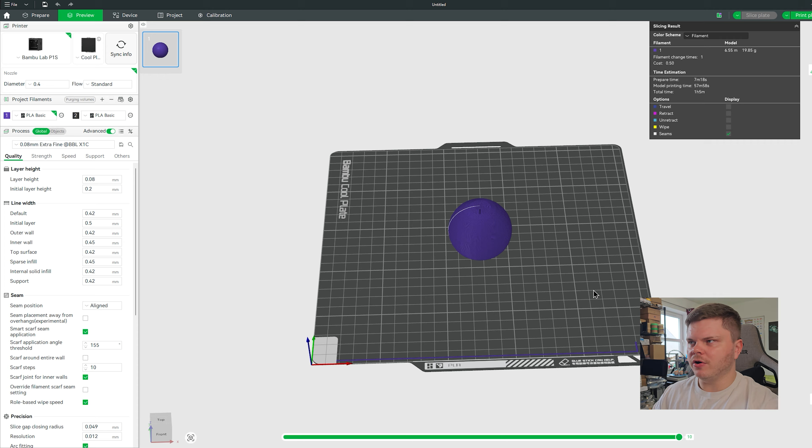Just a side point, you don't have to change the whole print profile to decrease the layer height. You can do it here in the quality tab. Under layer height, you can set this to whatever you want. So if you wanted 0.08, you can write it there instead of changing the whole print profile.

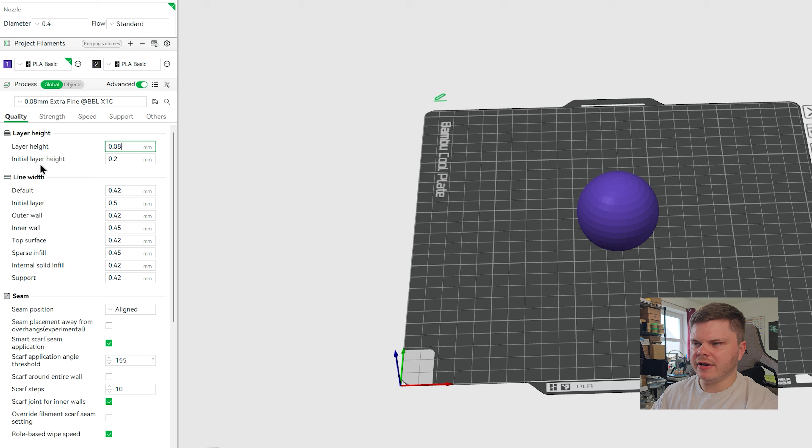And as you can see, you can also change the initial layer height, so the layer height of the first layer. Even with the 0.08 millimeter layer height, this is still set to 0.2. Basically, if the layer height of your first layer is too small, this can lead to bad print bed adhesion. That's why the first layer is usually still kept as 0.2 or higher.

So if I change the layer height back to the standard 0.2 millimeters and then slice and zoom in, you can now see these layer lines I'm talking about, particularly for a curved model like this. So you can see this obvious stepping of the curved surface towards the top, which with a larger layer height will be more visible. So if I do the same using the 0.08 millimeter layer height, it's much less obvious. Again, at the sacrifice of print time.

There are some ways you can reduce this stair stepping outside of the two main methods I'm going to show you today. The first one is to locate the specific setting in the quality tab. This is under advanced here. So just a quick disclaimer, if there's any settings you can't see in your own slicer, you might have to toggle advanced settings. So here's a toggle, and if you turn it off and on, you see a bunch of new settings appear. I don't think it's one of the settings that actually needs the advanced setting turned on, but anyway. The setting we're looking for is the only one wall on top surfaces.

So by default, this is turned on for top surfaces. And basically this can make the stair stepping look much worse, especially on curved models. The setting is best used for flat models, so straight edged. If you change this from top surfaces to not applied, you should see a noticeable reduction in the stair stepping.

So as a quick side by side, that's what it looks like without the setting turned on. Then when you change it, it's not super obvious. It'll probably be more obvious when you print something. But this is a simple setting, especially if you've got curved surfaces.

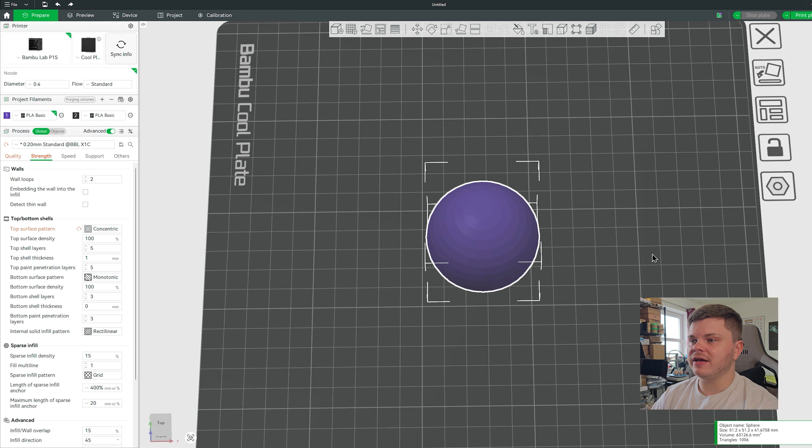So as I talked about, having a smaller layer height leads to less visible layer lines. However, having a small layer height for the whole model, particularly for curved surfaces, isn't necessary. And luckily there is a setting which allows you to apply different layer heights to different parts of the model. So this is called variable layer height or adaptive layer height, and in Bambu Studio it can be found here. It's called variable layer height here.

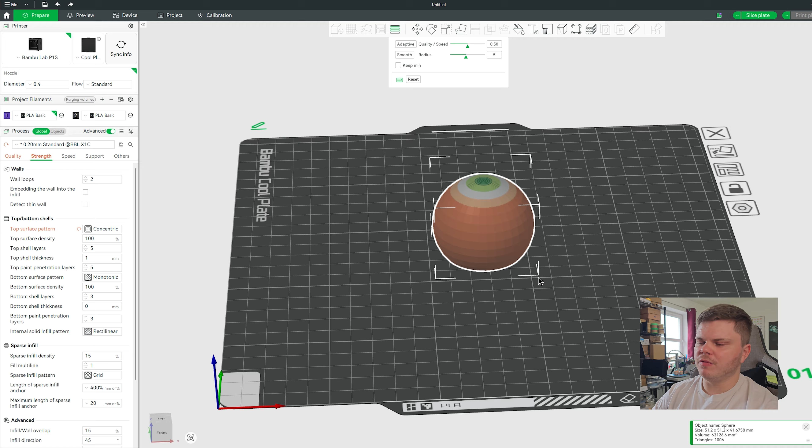And if you click on this, a tab opens up, which isn't super obvious what these settings mean. This top adaptive setting is what applies different layer heights to the model itself. So if you click with the default settings, you can now see different colors appearing on the model, which means each part of the model has different layer heights. So the more red or orange parts have a larger layer height, and the green parts have a smaller layer height. And you can double check this in the bar on the side.

So if you hover over it, it's saying the very top of the model has a 0.08 millimeter layer height, whereas as you go down to this part of the model, it has a 0.28 millimeter layer height, which is the largest layer height you can have for this size nozzle.

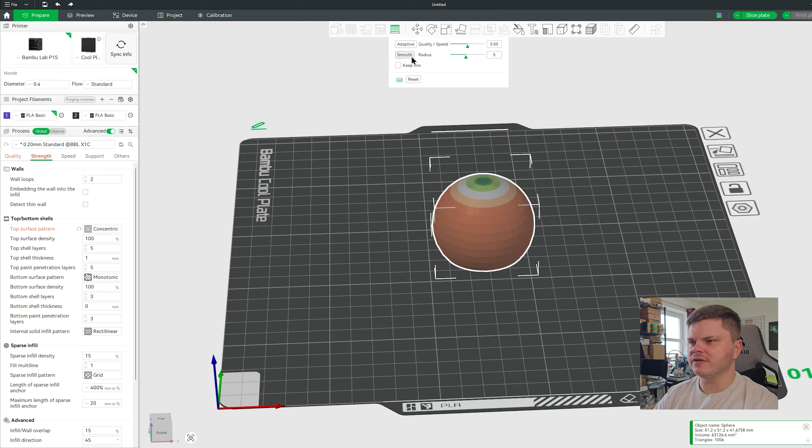The smooth function here improves the transition between the different layer heights. If you click that, you can see it's basically smoothing out the changes in the layer heights. And if you press it enough times, you can get it to basically completely smooth out like that. It has got rid of the 0.28 millimeter layer height that was just visible, but it will have a much smoother transition between the layers at least, so the model won't look as bad.

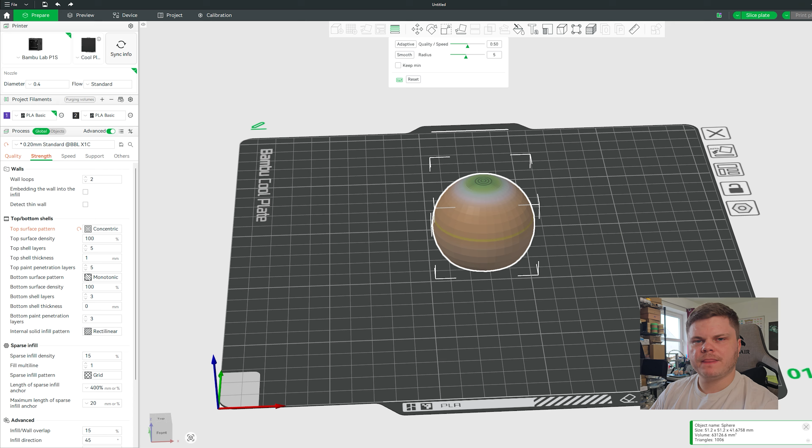So if you just want the layers to look like this, you don't want any smoothing, then that's fine. I personally think you should smooth it so the bar on the side looks nice and smooth rather than jaggedy changes in layer height. And if you're thinking, doesn't this setting just increase the printing time like decreasing the global layer height does? Actually no, because it's printing higher and lower layer heights in the same model. It doesn't drastically change the print time.

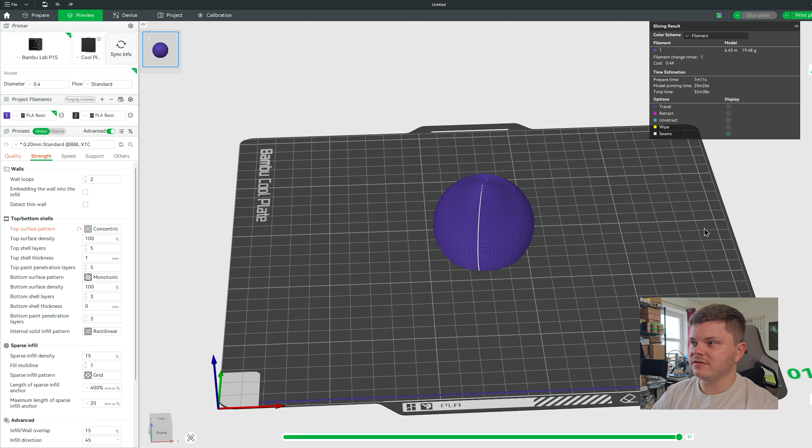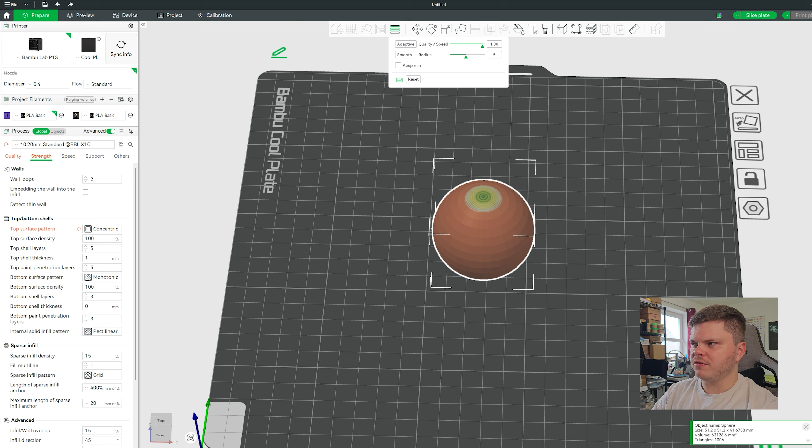So if we go back onto the variable layer height setting, I didn't talk about what the adaptive slider actually does. So essentially, if you slide it further to the right, it prioritizes printing speed. And if you slide it to the left, it prioritizes printing quality. So having it closer to 1 will favor larger layer heights until essentially the top of the model. Whereas if you slide it all the way to 0, this will favor lower layer heights throughout the entire model. And as you can see, there's a lot of green on this model, which you imagine will take a lot longer to print than the first version I showed.

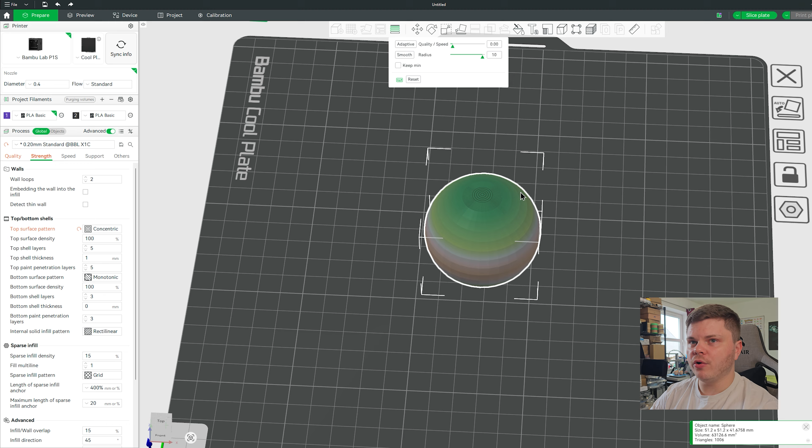And then likewise with the slider on the smooth setting, the higher the number for this is, the more aggressive the smoothing gets applied. So if you set it all the way to 10 and then click smooth, it basically smooths the whole thing in one go. Whereas if this was set to the default, which is 5, then you click smooth, it doesn't smooth it quite as aggressively. And also if you set it all the way to 1 and then do it, it's barely applied any smoothing. I don't really know why I would ever set it to 1, but the option is there.

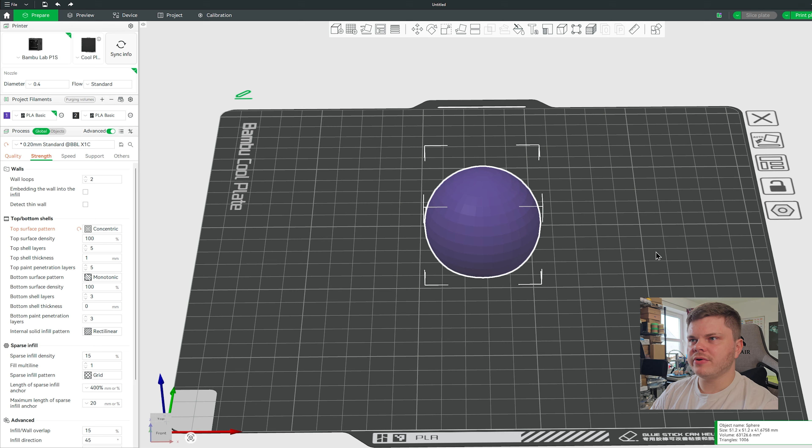So if I set this all the way to 10 and smooth it, as you can see, there's a lot of green on this model, but let's see how long this will actually take to print. So this will take 38 minutes for a high quality variable layer height model, which to compare to the 0.08 millimeter preset, if we reset this and set this print profile back to 0.08 millimeter extra fine and then slice, it's still faster than this because this will take an hour, which is double the original model's print time.

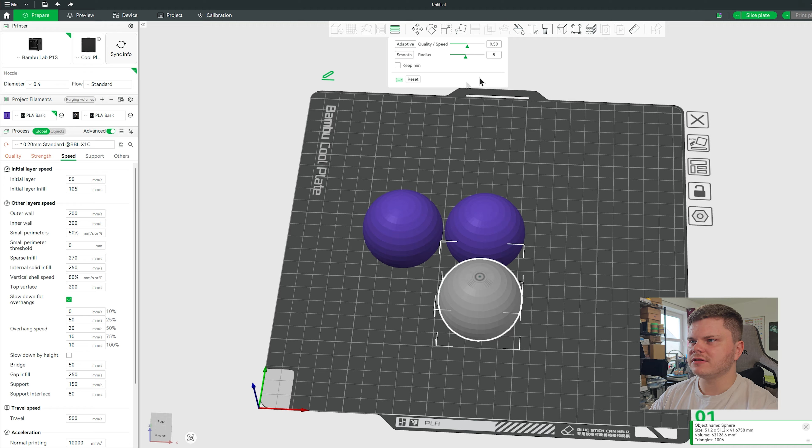I know it's not particularly clear the difference without printed examples, so I will print 3 versions of this model. One with the high quality variable layer height, so the adaptive set to 0, and then smooth it out once. And then another one with the default variable layer height settings, so the adaptive set to 0.5 and the smoothing set to 5. So click adaptive and then I'll just smooth it a few times so it looks like that.

And if you slice, you can actually see the difference even without printing. So you can see the 0.2 millimeter layer height here versus the standard adaptive layer height settings here, and then the high quality adaptive layer heights here. You can see the stark difference, particularly between the 0.2 millimeter layer height and the high quality adaptive layers here. Like the stair stepping is much more apparent on the standard version.

So this is the standard 0.2 millimeter layer height. You can see the obvious stair stepping here, which this is the standard adaptive layer heights added, which if you compare them is much better. And here's the high quality adaptive layers added. So you can see it's, again, a lot better than the standard one. However, not a huge difference between the two adaptive layer heights. So to save on print time, I would personally just stick to this one. It's unnecessary to use this one, I feel.

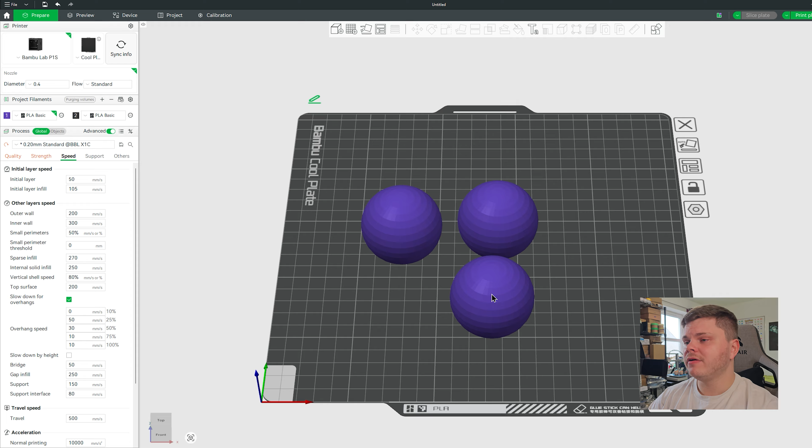The other method I want to show you is called fuzzy skin, which you may or may not have heard of. It does have a funny name. So if I delete these other 2 spheres, you're probably wondering what fuzzy skin is. So essentially the tool head will jitter randomly on the outer surface of a model, which will cause a rough texture to appear on the surface, which is why it's called fuzzy skin, so it does look kind of fuzzy. And I found this as a great way to hide layer lines and even seams for things like threaded containers.

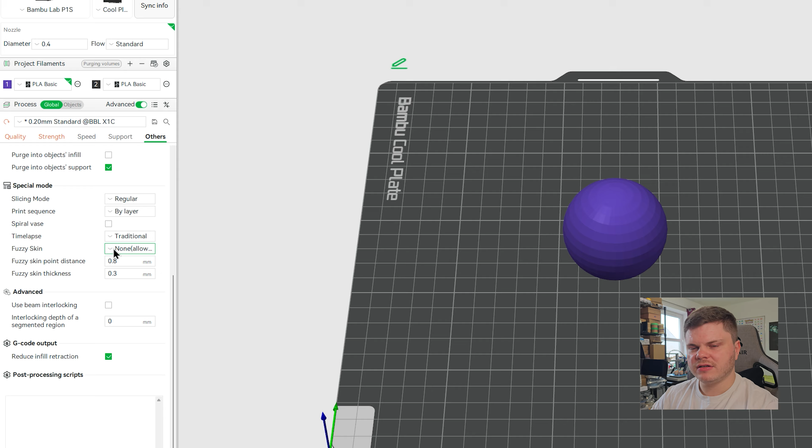The fuzzy skin settings can be found in the Others tab. So click on Others and scroll down. It'll be under Special Mode, at least in Bambu Studio. You can see here the fuzzy skin settings are here, these 3. So it's fuzzy skin type, and then fuzzy skin point distance, and skin thickness. So by default, it's set to None Allow Paint. I'll show you how to do that in a minute. And the other settings are Contour, Contour and Hole, All Walls, and Disabled.

So Contour applies fuzzy skin to all outer walls of your model, which is the most standard way you would use fuzzy skin. Whereas Contour and Hole applies the fuzzy skin to all the outer walls and any holes you have in your model, such as magnet holes or any connector holes you've added. And then All Walls, as the name suggests, applies it to all walls, inner and outer, which I don't know why you would ever use, but I'm sure there is a use for it. And then Disabled turns off fuzzy skin completely.

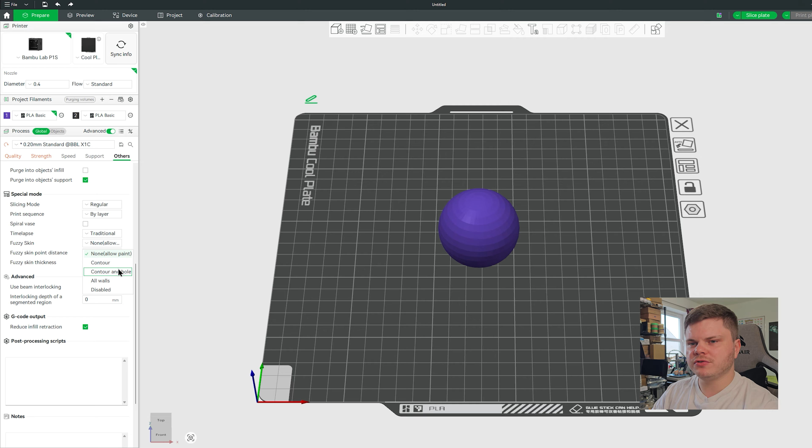But if you've got it set to None Allow Paint and you haven't done any fuzzy skin painting, then it does the same thing. So the ones I would stick to would be the Allow Paint setting, Contour, or Contour and Hole if you do want to add fuzzy skin to inner holes as well, which I believe could be good for adding friction to fittings, for example. Anyway, if I set this to Contour, these are the default fuzzy skin settings. So if I then slice, you can now see the surface of the model. It looks weird. It looks fuzzy, as the name suggests.

The default settings are quite aggressive, so it is a very noticeable texture on the surface, which I actually quite like, but some people might find it too textured. If that's the case, you can play with the settings. So the fuzzy skin point distance and the thickness are the two you want to play with. So the point distance, as it says here, is the average distance between the random points introduced on each line. And then the thickness is how wide each jitter is. And it does say it's recommended to keep this lower than the outer wall line width. I guess it's so you don't cause any weird defects with your model.

You can play around with these settings and see which works best for you. The settings I found are quite nice: a 0.4mm point distance and 0.2mm thickness. But there are models on MakerWorld like this, which is basically a fuzzy skin sampler, which has a bunch of different settings on it. So you can see which ones work for you. So obviously the lower you set the point distance and thickness to, the less fuzzy it looks, and the more it will resemble a non-fuzzy skin print.